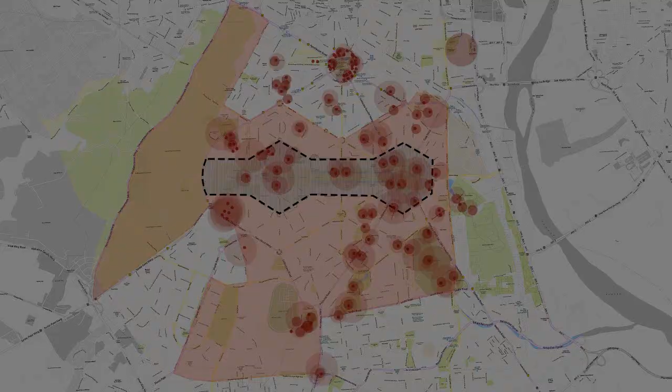If we break the whole thesis project, it can be divided into 4 parts: first, research design, second, urban design, third, case studies, and the fourth one is architectural design.

Research is to find parameters for defining architectural character of cities. From urban design, it means master planning of Lutyens Delhi. Case studies help in design considerations.

I know the project I choose for my thesis is never going to be built, but it can help establish an example in our future collectives for the students and maybe for the architects also.

As we all know, cities are losing their architectural character, which increases the gap between architectural heritage and smart technology. Main reason for this is rapid urbanization.

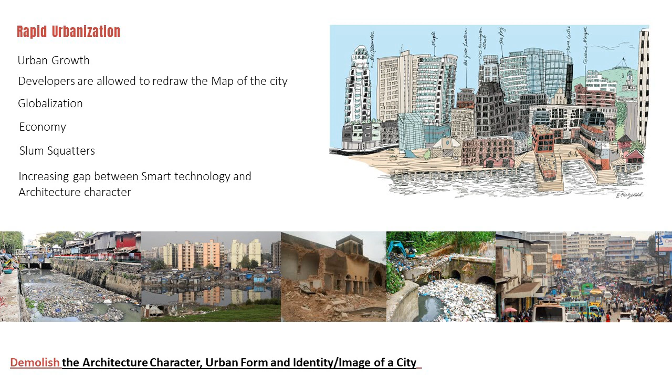As an architect, one should understand the difference between role and responsibilities, which is connecting architectural heritage and bonding architecture with cities.

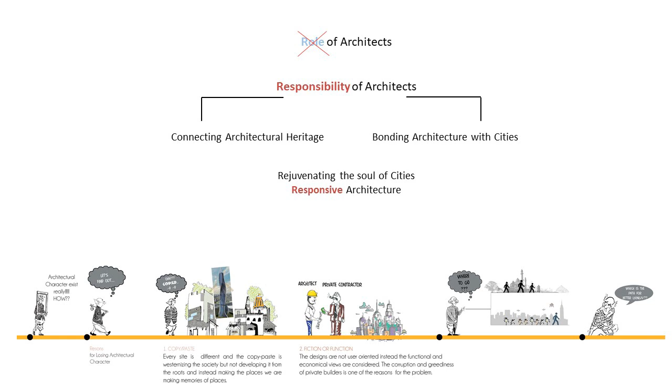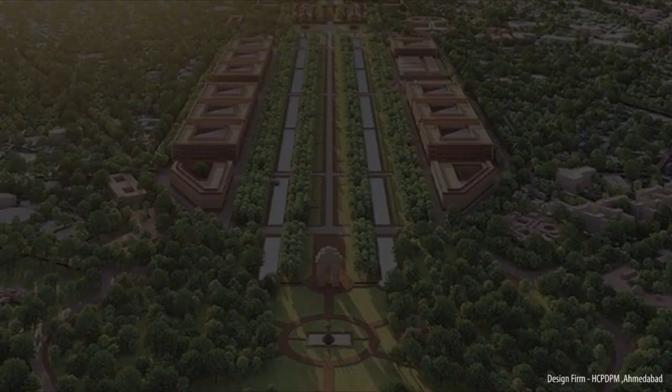Besides rapid urbanization, sometimes political agendas also become the reason which contributes to the loss of architectural character of a city, as in this current scenario of Delhi's Central Vista project.

Critics said this was a Bharatiya Janata Party pet project to put their stamp on the capital of India.

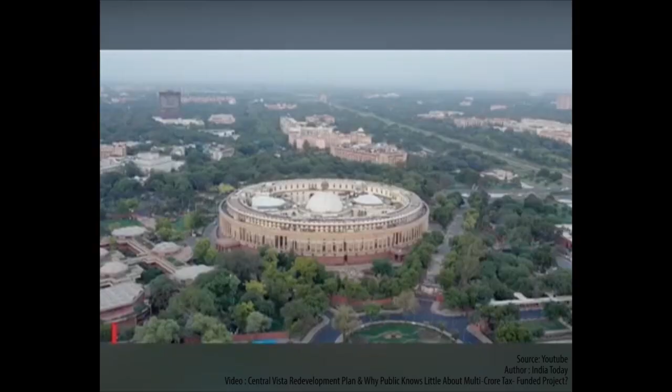The government claims space crunch is the only reason for these new constructions.

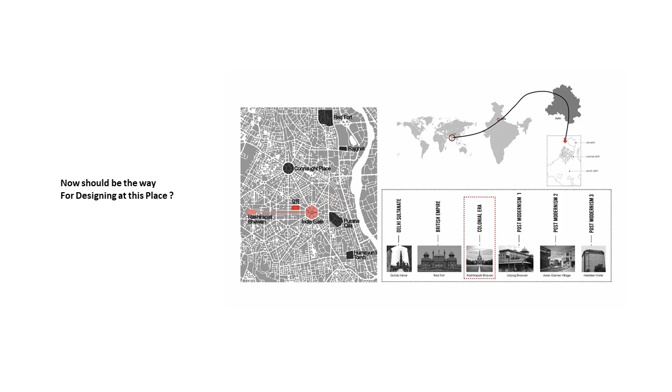First thing we need to understand is that change is reality and we can't just keep on repeating the history every time. Taking inspiration from the past and responding to the present for the future should be the aim.

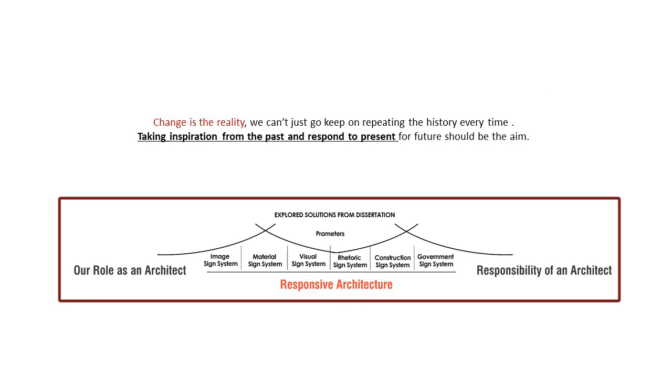Second thing is implementing the parameters for shaping architectural character of a city. Third is to understand what is at stake. Here, the whole scheme of Lutyens Delhi is at stake, including the urban morphology of Central Vista like hexagonal roads and formation of equilateral triangles between the domes.

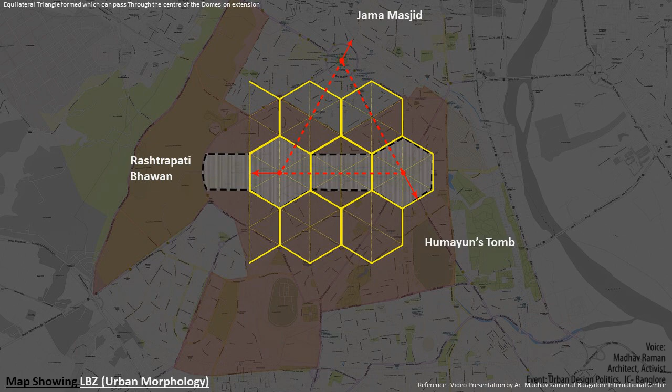All this is very exciting for me as an architect because there's just so much to grapple with conceptually in an abstract way. But that's not really why the space is important.

The reason why I think fundamentally the space is important for us is that without laying a brick on this colonial space, over the years of independence we've had, slowly but surely the people of this country have physically reclaimed this space. I would like to share some images over time to reiterate how important this is as a national space.

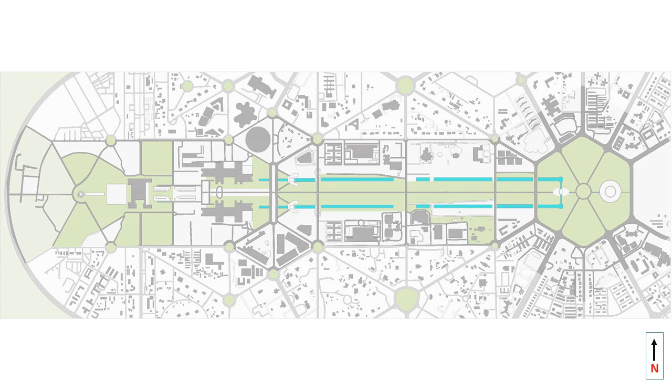So our final aim should be to add only the required amount of buildings, which acts as a bridge between a building for the government and a space for the public, which also helps in conserving, evolving and transforming our past in a new way. This is an image of the present Central Vista.

Buildings currently present there, hutments which need to be removed, proposed road network in a hierarchical manner with huge landscaping elements. These are the residential government buildings.

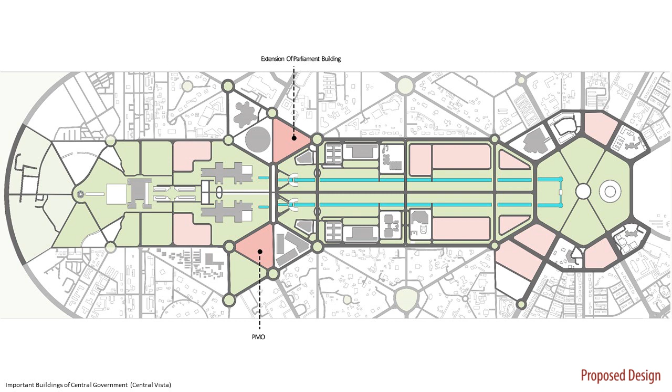Important buildings like PMO and extension building of Parliament House, shifting IGNCA to a new location, adding a center of performing arts by following the Lutyens master plan of Delhi. Finally, all the secretariat buildings that were the main objective for our government.

Parking area allotted for the public in Central Vista. This is the final proposed scheme of Central Vista.

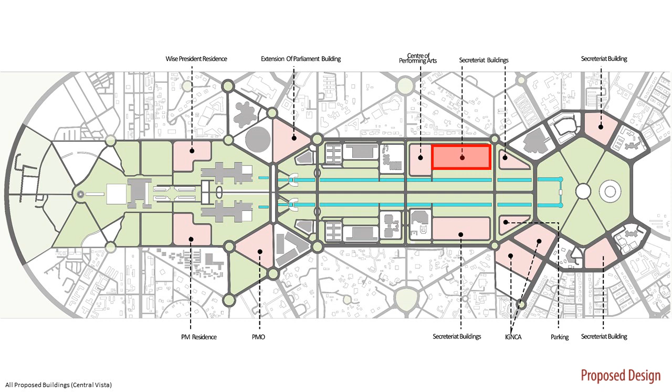But this is an architectural thesis, so as per the discussion earlier, my final outcome would be a secretariat building whose site is marked in the master plan.

Now, upcoming slides are for the design strategies and form evolution of our building. First, the building should be oriented according to the sun direction. Courtyard planning as a part of Lutyens Delhi, and inviting the public as our initial concept for the design.

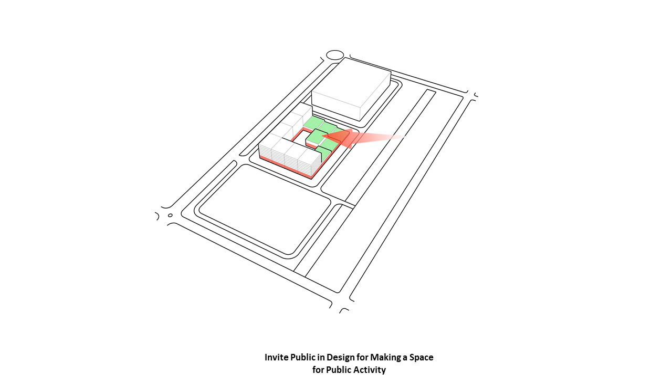This is the basic form. We need to add and subtract things, pushing the 4 sides below for reinterpreting the materials on the walls.

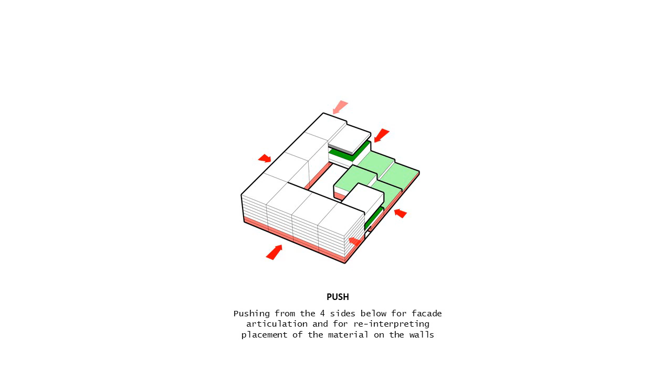Separating each block, introducing the cafe in the mid floor of the building, rotating the blocks for making an open green space, and connecting the blocks which would act as a platform for the public.

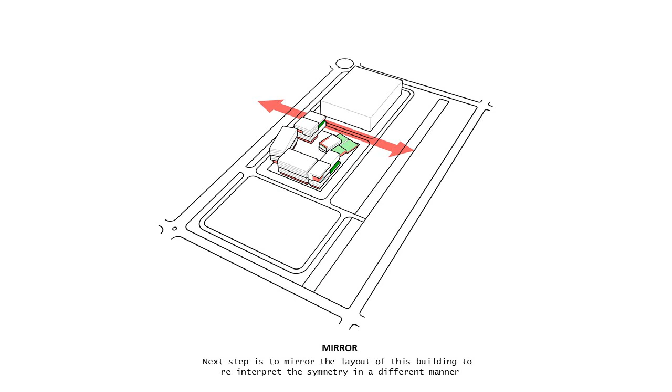Reinterpreting the symmetry by mirroring the layout in the adjacent plot, making a central courtyard access for the 2 buildings.

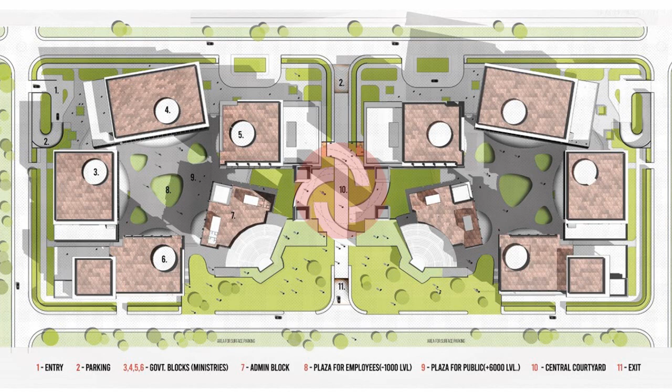Next is the ground floor plan showing all the entries, lower plaza for the government employees, entries for parking, exits from parking, and finally our 4 blocks. This is how it looks like.

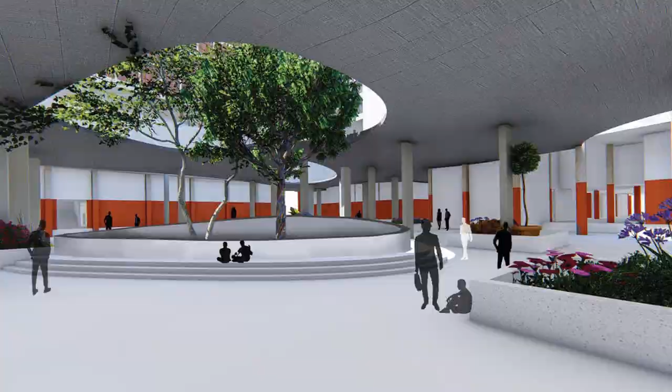This is the concept for designing an individual block for the employees, having some green areas and so many interaction spaces with a proper working environment.

This is how the form of one block evolved by placing mezzanine floors in between each floor, except on the 2nd and terrace floor for making terrace gardens. This is how it looks like.

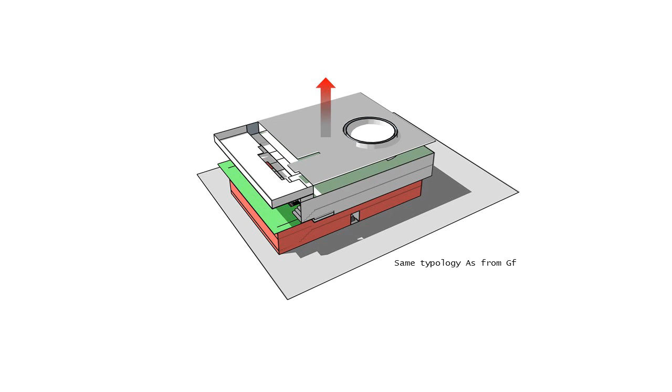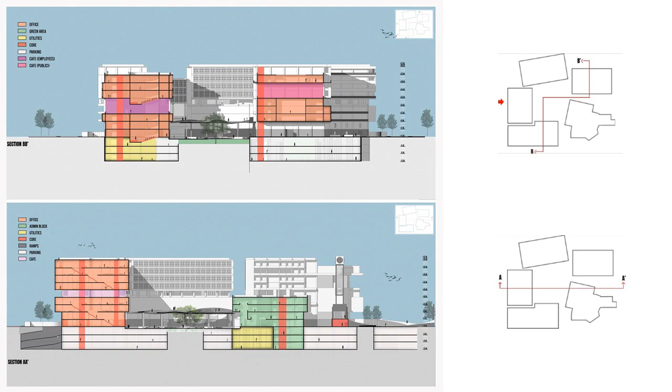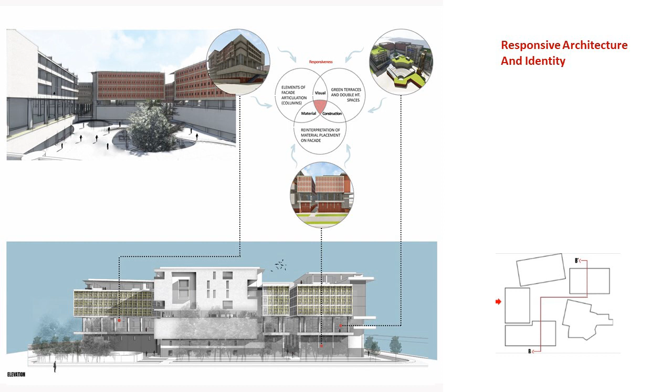This is the final illustration showing the public realm and how the building can solve the security issues and make it more safe for the government employees.

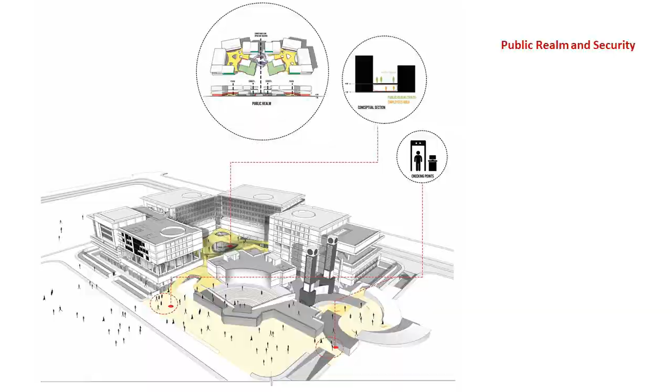This is our final outcome after all the designing and modeling part. This view is from the Central Vista region which connects to India Gate.

What has happened is that architects have lost their agency. They are prepared to do anything for people in power. The only voice today which is legitimate is that of the citizen.

It is a space where families converge and end up owning it. It is a place where people go for their nightly ice cream. The question is, how is this done?

Is it done by wiping out the previous identity and imposing a new one? Or do you add on to it, do you amend it? I wouldn't call it a new identity per se. It will be the identity of a new India, not a new identity of India. It's a space that is yours, the people's.